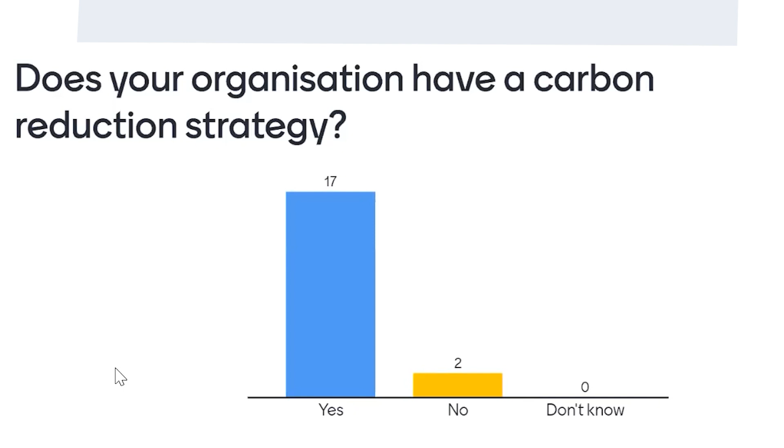Thanks, Shaun. Good morning, good afternoon, good evening, everybody. Yes, we're going to start off today's discussions by a quick survey. It's all anonymous, so don't worry about getting the wrong answer. So if we share that screen now so people can see the question. So there you go. I see a lot of you have punched in the answer already. Excellent. Does your organisation have a carbon reduction strategy? Yes, no, don't know. So most of you have got a carbon reduction strategy in some shape or form. That's really good to see.

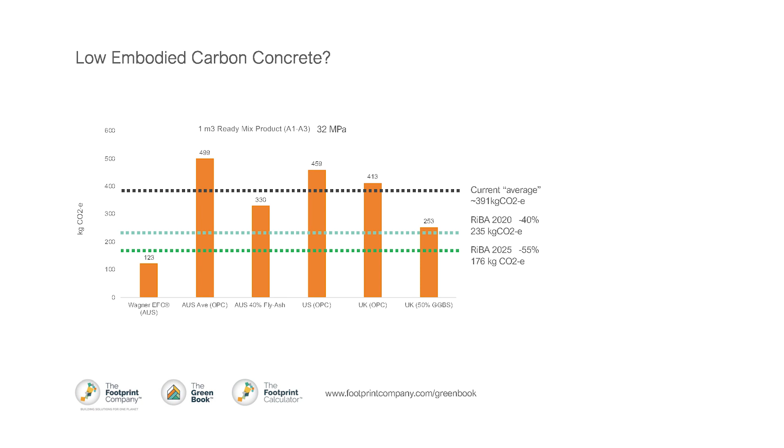So in a nutshell, what we want to be actually asking for: if we want to be pushing our building towards something akin to this Paris goal, net zero, using the Royal Institute of British Architects percentages, then we want to be looking for a performance target of 176 kilograms of CO2 for our concrete delivered to site.

We have, as we heard, 700 billion pounds, which is an awful lot of Australian dollars, of infrastructure projects in the UK. Making even just this simple example and providing a number means that when you put that out into the market, it takes the argument away from saying, I want concrete specific ABC, which tends to, when you nominate a product, push the price up.

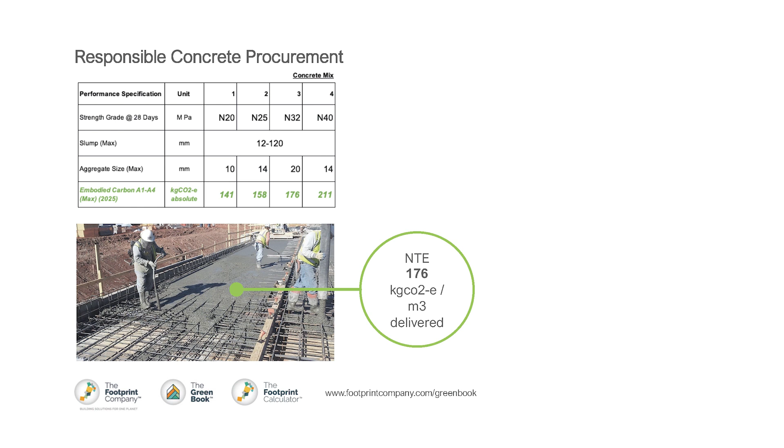In this way, you're just saying, here's a performance metric, and if you don't meet this performance metric, then you can't play. Overnight, you will transform the industry because all of these guys know they can't meet that number, and so they will have to reform the way they do business, the way they procure things, the way they deliver and act as businesses to be able to deliver these numbers. And it will open up the market to innovation and alternative products that we frankly probably don't even know are around the corner.

So let's take another example, the humble brick. If you're to believe all of the noise, if we just built enough buildings of brick and timber, we wouldn't have climate change. But here's the failure of the way our systems currently work. You could probably get half a dozen EPDs, environmental product declarations, from half a dozen different systems around the world. Generally speaking, the environmental product declaration you pick up will communicate the global warming in kgs of CO2 per kilogram of brick.

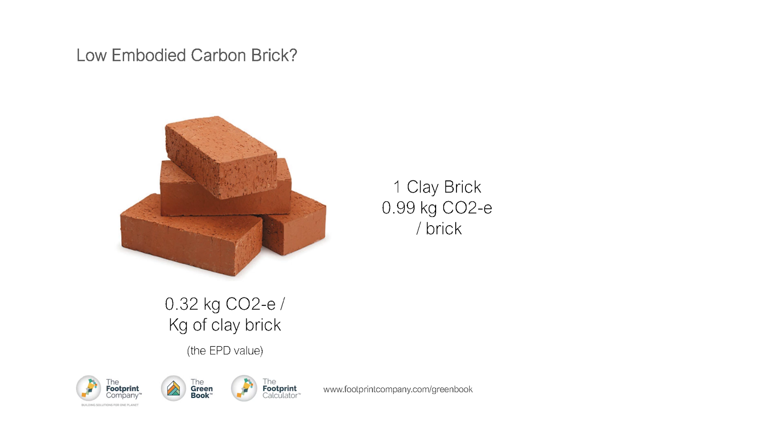So in this case, this is a clay brick in Australia, and for every kilogram of brick, we have about 0.32 of a kilogram of CO2. But then a designer is saying, I have 10,000 square metres of wall, and I just want to know how much is 1 square metre of wall. So how many kilograms of brick is in my wall? I don't know, this is too hard. I'm going to go off and do something else. And if we think about the individual brick itself, it is over 3 kilograms. So 1 brick of this type of clay brick is 0.99, almost 1 kilogram of CO2 per brick.

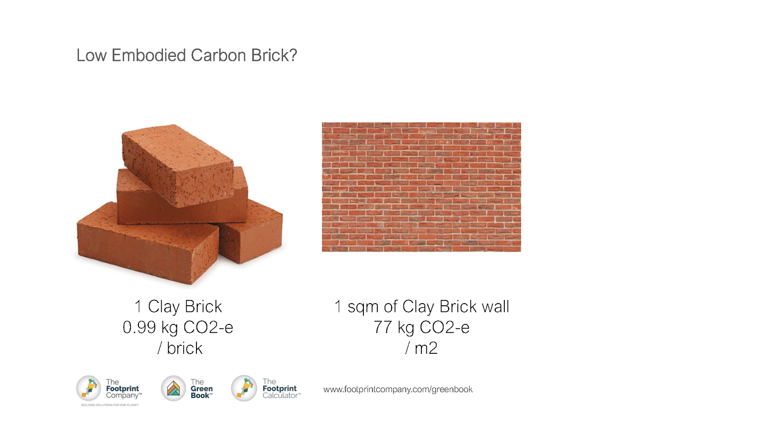And then we look at that individual brick and we pop it into a wall, and on the basis of the size of this brick, we need 50 of them to make 1 square metre of wall. And then we need cement and sand and some labour to put it all together. And now we have, for 1 square metre of wall, over 77 kilograms of CO2 per square metre of finished one skin of this type of brick wall. So, brick, are we buying Rockstar or a climate rock?

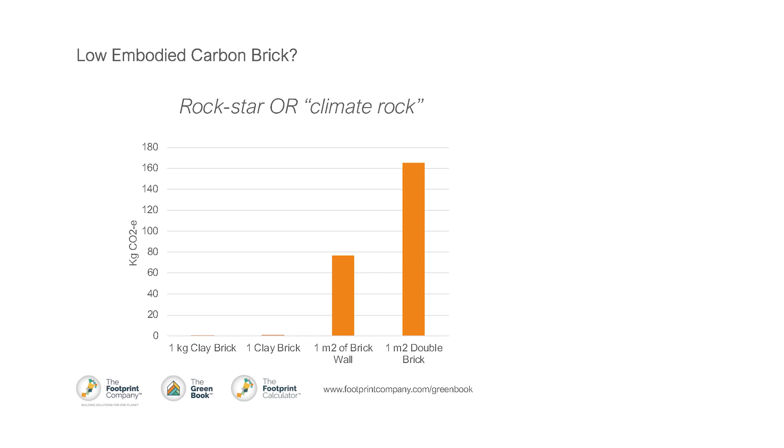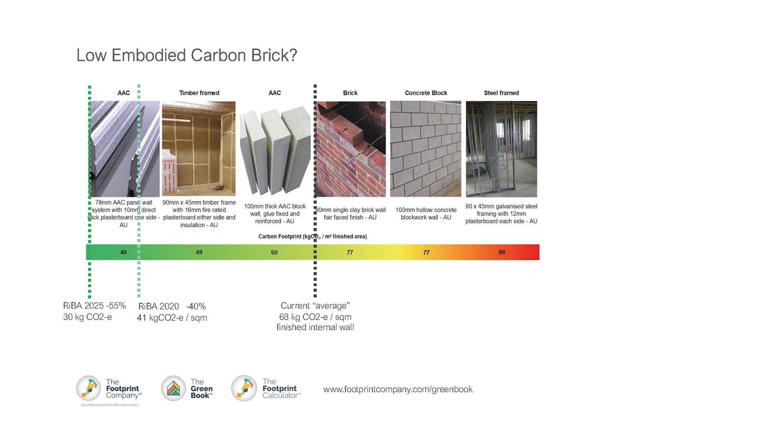Having said all of that, if we then had a look at what might be some of the recycled content versions or options for some of these things, we have variants of steel framing here in this country that would bring it, if we utilise them, from 86 more down to here. As I said before, if you were using a non-cement based mortar and potentially a carbon neutral brick or something, you would transform this number to be down in this zone, and a bunch of different options in between. So that's why it's really important that we move towards these performance metrics in a functional unit that is in the form of the consumption and how we think about the design and use of the materials.

Of having time with you this evening, I would say to you that there's just an urgent need for all of you who are in this area of sustainable procurement to learn how to ask for that product with a quantitative performance metric, not low embodied carbon or it's just got an EPD. We want to be able to also then essentially reform the basket of standards that we have, recognise that they're not really serving this purpose to advance our reductions in a scientific and evidence and quantitative comparable way, and reform those standards so that we do start making traction in that area.

The Royal Institution of Chartered Surveyors put out a terrific guide about how to measure whole building embodied carbon. There's a bunch of things that they included that were a great start, and then a whole bunch of other things that then a number of us here in Australia are working towards in terms of filling in some key gaps on how do you normalise the functional area, some technical standards and methods around all the different types of regional issues, inventory issues, and a few other technical things that take a whole webinar that's not sort of just 10 minutes, and to try and improve these things so that you, as very forefront of making these actions, have the ability to start asking for it in a metric that, as I said before, will transform the industry overnight.

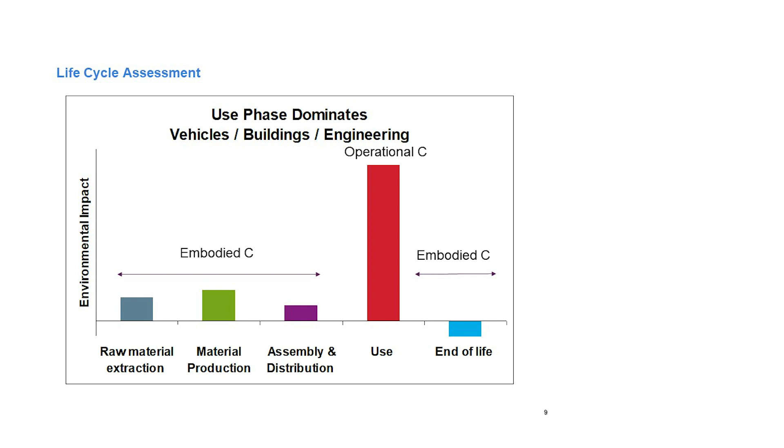But what's important about this? So I've said that operational carbon tended to be the priority. So the policymakers, the politicians all said, look, we've got to make cars more efficient. We've got to make buildings more efficient, because we've looked at the LCAs and that's where 60% of the emissions are. Concentrate on that. So over the years, what has happened is that we've reduced that with an attempt to get the operational carbon down, and this graph here shows it's 0.

But by doing that, you may have added material impacts, embodied energy, which I know is one of the concerns of this meeting here. So you might have triple glazing on buildings, you might be building solar panels, you might be building new wind farms and putting them next to it. So you might have low carbon technologies, but more materials to achieve that.

And another interesting aspect of it is that end of life side, is that some of the materials that we're using now to create low carbon in our society are less recyclable, or perhaps the recycling has not been considered very well. So electric vehicles, the batteries, it's pretty energy intensive to make a battery, and it's very difficult with the current battery designs to recycle them. At the moment, that's not really talked about very much.

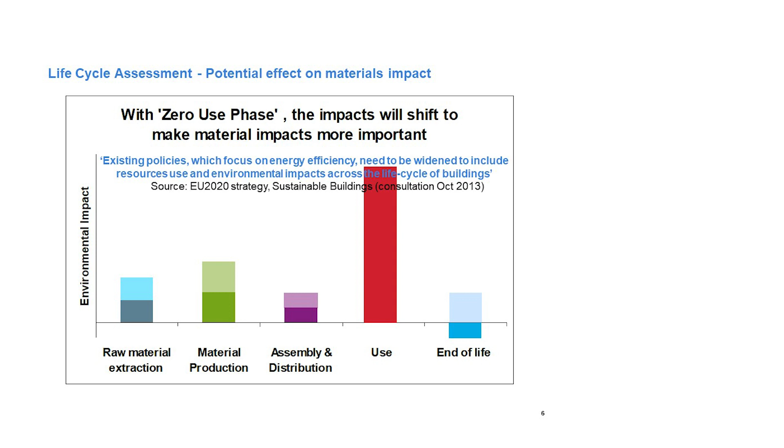But one of the things you could think about here is, are you solving a problem of carbon and climate change, but actually ending up with a materials resource efficiency problem? In other words, shifting from a climate change problem maybe to a circular economy problem. And so I'll talk a little bit about circular economy. And on this slide, assume that this was about carbon and embodied carbon. But one of the things that Caroline touched upon is what is the carbon doing that you've embodied?

But the highest attribute you can have for circular economy is creating a product that lasts a very long time and continues to work well in terms of creating social value. So in other words, it works, it's efficacious, it's got efficacy, and it's efficient, and it lasts a long time.

So if you reflect on some of the thinking we've got today about embodied carbon, if you had an embodied carbon calculation for a building that lasted 10 years, how does that compare with something that might have twice the embodied carbon, but lasted 100 years?

So, and then you start thinking about the whole life cycle of buildings and structures and all the stuff that, so in many respects, and you can go down into things like reuse, life extension, maintenance systems, all those things, which effectively do increase the life of these products going forward.

But one of the big things that happens is eventually the social value can deteriorate in the product. In other words, we don't think it's useful anymore, either as individuals or as groups or as investors maybe. And so it's something to think about in terms of circular economy.

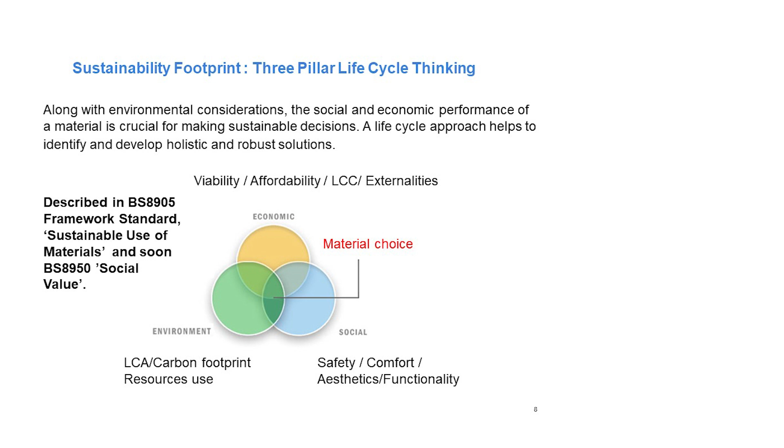But more recently, there's been a really good standard on social value. In other words, trying to set out what we mean by social value in terms of the well-being of society, the well-being of individuals, and so on. But what's not been addressed really, and it has a strong relationship with sustainable procurement and the ISO standard thereof, along with many other things, is thinking about social value across the life cycle.